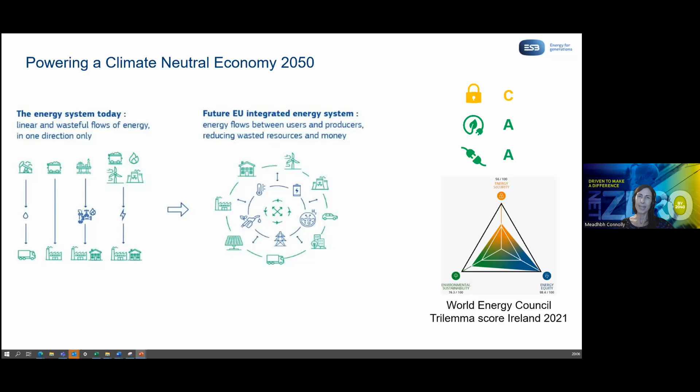So we started 100 years ago with a highly renewable electricity system powered by Ardnacrusha. And then we progressively carbonised our system as we became pyromaniacs and discovered the convenience of burning fossil fuels to produce electricity. The power output was dispatchable, which makes for a very reliable system where the generated electricity can be just adjusted up and down to meet demand. And it was also easy to stockpile fuels in oil tanks, in the coal yard, in peat bunkers, making the electricity system very secure for a few weeks in case of fuel supply interruptions.

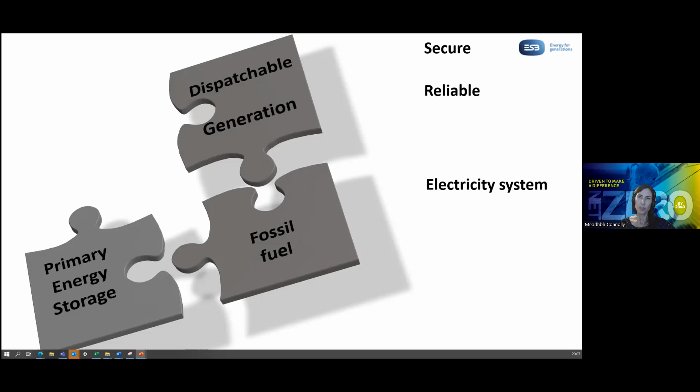We woke up, albeit late, to the carbon problem, and we focused on building renewables. However, fossil-based dispatchable generation still underpins the reliability of the system, and the primary energy storage, the oil tank, the coal yard, the peat bunker, the gas field, and the large valve to European gas supply secures this energy system.

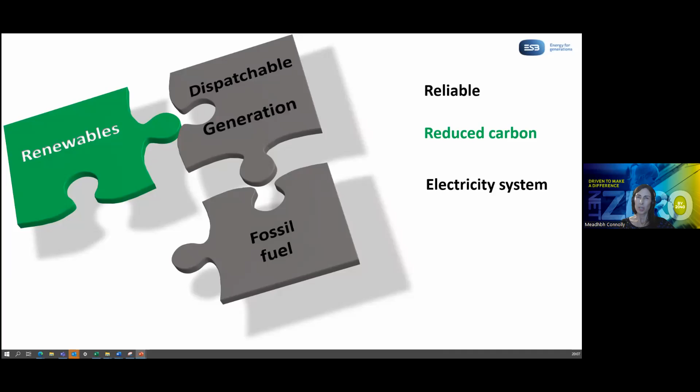As we close oil, peat and coal generating stations, which is the correct decision as we decarbonise, and their associated primary energy storage, we dilute the security of the electricity system. If we were to take out the fossils entirely and just have renewables, well, we'd have a renewable electricity system, which is intermittent and not secured.

If heat and transport are electrified, and we no longer have tanks of oil in our driveways, our bus depots, our back gardens, then a weather-dependent electricity system will have a greater significance in the overall Irish economy.

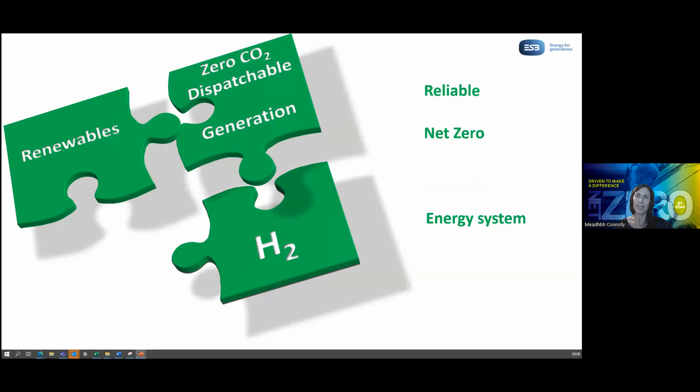And if we extend the reach of our renewable generation into the hard-to-abate sectors, such as the high-temperature heat and heavy transport, using hydrogen produced from renewable electricity, we can achieve a zero-carbon energy system. But we don't want a scenario where we have to check the weather forecast to see if the 46A electric bus will be running, or if the heavy goods vehicles can have enough renewable hydrogen to deliver food to supermarkets. To ensure a reliable system where energy is available on the calm, dark days, as well as the windy or sunny days, we need to add in zero carbon dispatchable generation that can be ramped up and down as needed to meet demand.

But these dispatchable generators need the zero carbon fuel. So to secure this zero carbon system and supply strategic and operational fuel reserves for this dispatchable generation, we need to store enormous quantities of energy. So the foundation for net zero is based on four large infrastructural elements: renewables, hydrogen, zero carbon dispatchable generation, and storage. Don't be deceived by this simple four-piece jigsaw, because it's not easy. The delivery of this infrastructure needs to be planned within a whole system integrated approach that aims to synchronize all the elements to build a secure, resilient, reliable system at the lowest cost to the customer.

Hydrogen is not last mile on the net zero journey. We urgently need to enable development of renewable projects for hydrogen production as well as for electricity, so that we can transition dispatchable generation from fossil fuels to renewable hydrogen. And we need to develop large-scale storage projects, which are no-regrets, delivering security of supply in the short term and enabling transition to zero carbon solutions in the longer term.

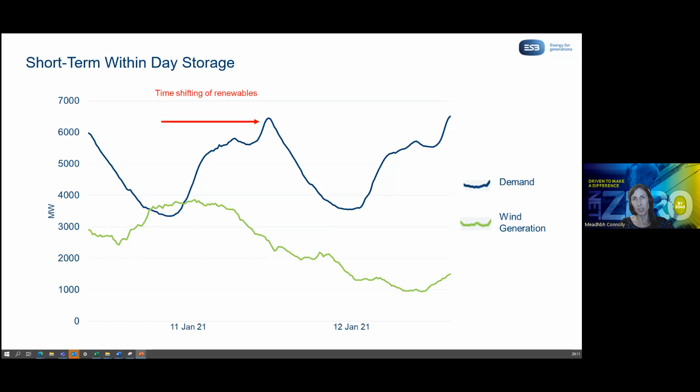I want us to focus on the longer term storage, the periods of no wind that will exist regardless of how much installed capacity. So what is the 10-day storage solution? What's the backup to renewables for the so-called Dunkelflaute events when there's no wind or solar? And what about Q3 in 2021, when there's a period of up to 6 weeks of no wind in Ireland, and no wind in GB, and no wind in Northwest Europe? So while interconnection is important, it has limited benefits in interconnected systems based on renewables that are all exposed to the same weather anomalies.

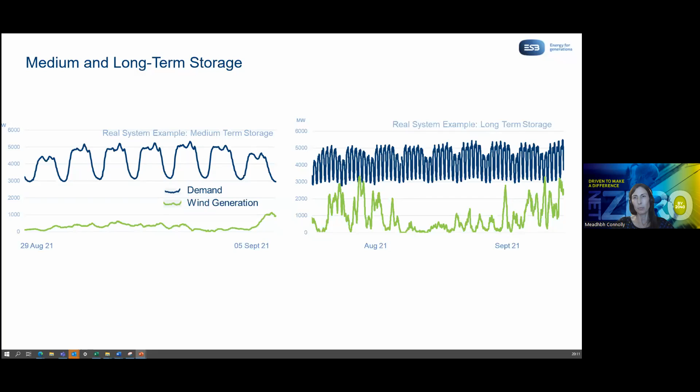And that's just the 2021 electricity system. What about when we electrify heat and transport, and we transfer the seasonal patterns from the fossil system to the electrical system? The seasonal variability of heat dwarfs that of the current electricity demand, with over 7 times the difference between the daily minimum and the daily maximum in energy for heat demand. It's a big challenge to flatten this curve. So electrification will further drive the need for seasonal storage, even with increased efficiencies due to better insulation and use of heat pumps.

In fossil-based systems, oil, gas, and coal can supply baseload energy and do all the heavy lifting in balancing the energy for electricity demand and heat demand. Dispatchable generation, be it oil, coal, and gas, is ramped up and down to meet electricity demand and heat demand. And there's pressure on the gas demand, as we saw in 2018 with the beast from the east. We diverted the electricity system away from gas and over to coal, oil, and peat to make sure gas was available for residential heat. But in a zero carbon system with high levels of wind, the system imbalance between electricity demand and available renewable generation could be multiples of what we see today, but without the ready access to fossil fuel storage to manage it.

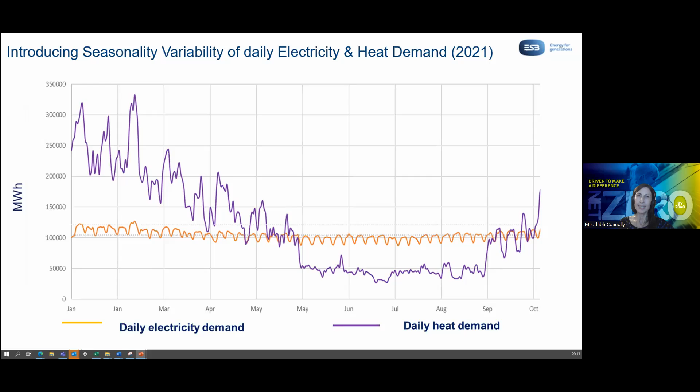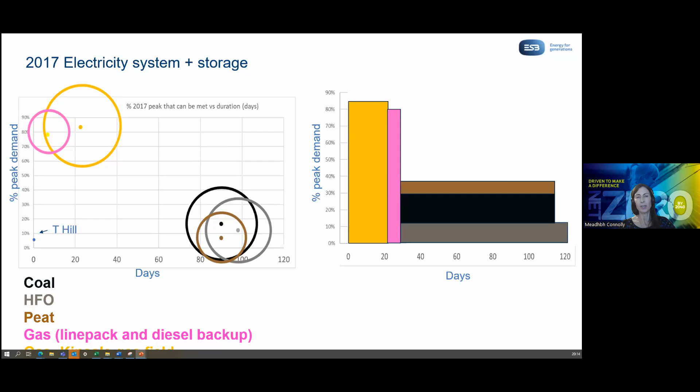If we move forward to 2025, the gas storage at Kinsale is closed, the peats are closed, Moneypoint is no longer burning coal, Tarbert is closed under IED. So the primary storage is whatever line pack there is in the gas and the distillate backup as mandated by the grid code for the gas turbines. And I'll remind you, Turlough Hill and the couple of battery projects will be that small little dot in the bottom left corner.

So we could keep about 66% of the energy system going just for a couple of days. And bear in mind the World Energy Council trilemma I brought to your attention earlier on - we had a score of C there before we lost these primary energy stores.

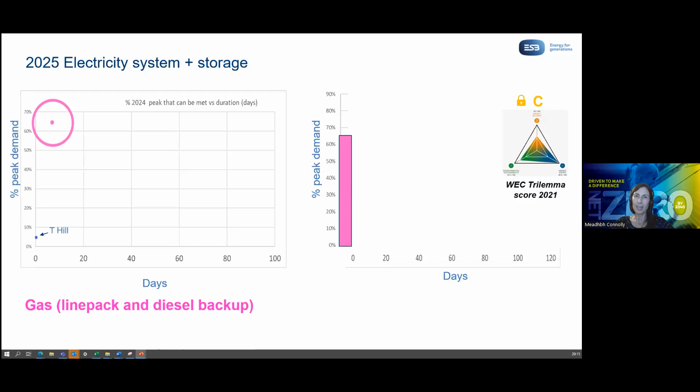So some would say we have evolved to a large European gas network, and I produced these slides before the situation in Ukraine arose. The large circles with the flags represent gas usage, and their relative size illustrates relative consumption of gas across various member states. The smaller circles within the flagged circles stand for the capacity of the gas storage infrastructure in terms of days of gas consumption. Germany, a large gas user, has infrastructure to store gas to meet its domestic requirements for 96 days. Great Britain is also a large consumer of gas, with infrastructure to store gas to meet its domestic requirements for about 5 days. Ireland is in the process of closing our only gas storage infrastructure down in Kinsale, which was 2.3 terawatt hours. We're connected at the tail end of a European gas network via a non-EU member state, which itself has very low gas storage capacity compared to its usage.

Paul Deane in UCC has repeatedly said, energy supply is not just a matter of physics anymore, it's a matter of politics. And while physics is predictable, politics is anything but. So can we assume that the UK will keep the gas valves open in case of an emergency?

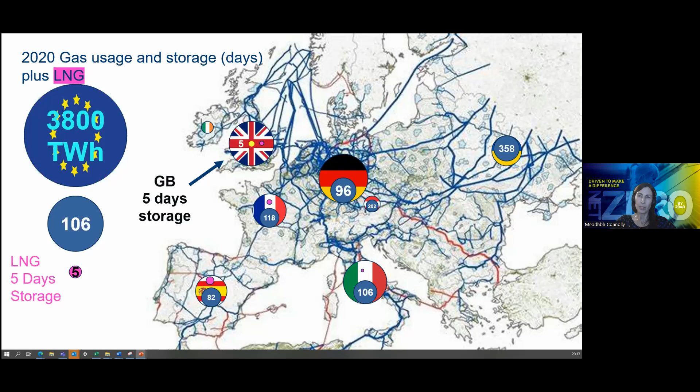Just to reinforce my earlier point about infrastructure capacity for various member states and gas storage, annual gas consumption in Germany and GB is similar. This graph represents the current gas storage in Germany, Italy, France, and UK. Germany's current gas storage is about 24 times that of GB.

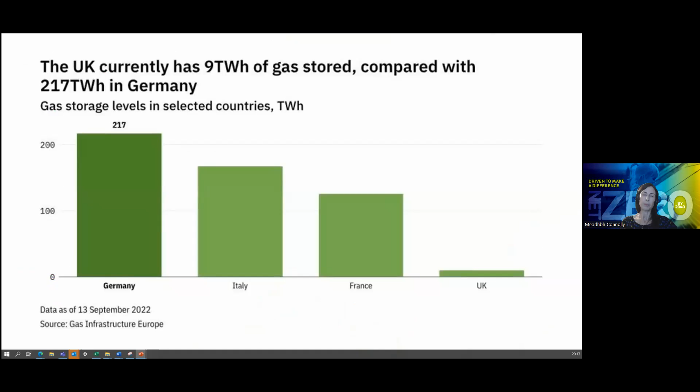As I said at the start, we've a long way to go on the decarbonisation journey, despite all the wind farms that have been developed. The SEAI data is very insightful. In 2019, around 90% of our energy use was fossil-based. Net zero needs a lot more renewables.

But it's also interesting to look at energy storage that's securing our energy system. On the right-hand side, I've brought out the primary energy usage based on the SEAI data. The circles on the right are scaled to proportion. The outer circle stands for usage, and the inner circle is an estimate of storage capacity under each fuel. In 2019, our primary energy usage was 170 terawatt hours, and the storage capacity was equivalent to about 59 days of this energy usage. But we can see the primary energy usage is heavily dependent on fossil fuel. The primary energy sources with the most resilient storage capacity are oil, peat, and coal, all on a downward decline as we decarbonise. Wind generation backup in Turlough Hill is a mere 1.4 hours equivalent, back in 2019.

So there are about 8.5 weeks of primary energy storage. 96% of this is in the form of oil, peat and coal. So this form of storage needs a zero carbon solution as we move to net zero.

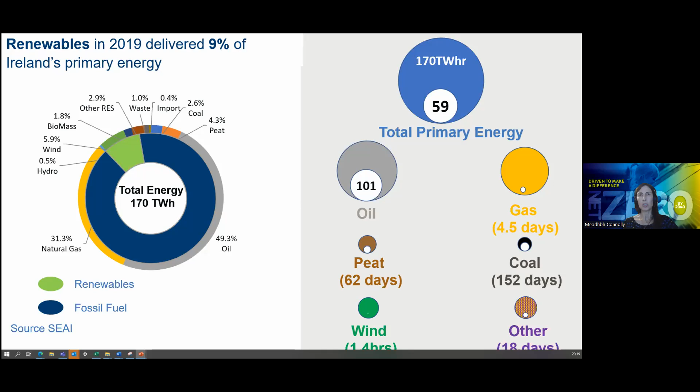The 2019 system, I've illustrated here using scaled circles. The sources of primary energy storage - oil dwarfs all of the others. We've done estimates for primary energy requirements in a net zero system, and happily we come up with a figure consistent with the UCC figure, about 128 terawatt hours. I'll talk about that later. So in 2050, if we replicate the current levels of primary energy storage of 59 days, that'll require more than 20 terawatt hours of zero carbon energy storage.

This graph shows the various technologies to support a zero carbon energy system. We need all of them, from the short-term timescale to ensure system voltage and frequency are kept stable, right out through the storage to deal with system resilience. Oil storage has traditionally provided this in preparation for global supply shocks.

There's an important feature of this graph on the left-hand side, which shows all of the technologies on one graph. The storage capacity is on the x-axis and the discharge time on the y-axis. It hides scale - the scale of seasonal storage required is enormous. It'd be the equivalent of 1 billion Tesla Powerwall domestic batteries. It's equivalent to about 10,000 Turlough Hill pumped storage units. It's equivalent to 500,000 of the Aghada BESS projects that was recently commissioned by ESB.

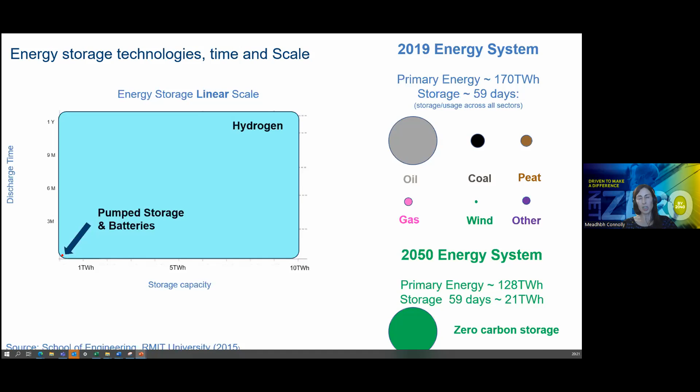So the only solution really we have in Ireland in this space is hydrogen. We don't have the nuclear option. We don't have geology suitable for geothermal. So the only solution is renewable hydrogen.

Looking forward to 2050 and what that would look like, the EU strategy is to electrify as much as possible. Our estimates are 62 terawatt hours of renewable electricity for end use as electrons. To put that in context, the current electricity system is about 40 terawatt hours.

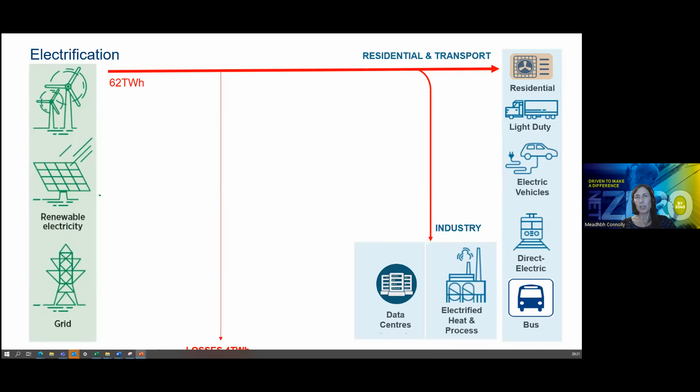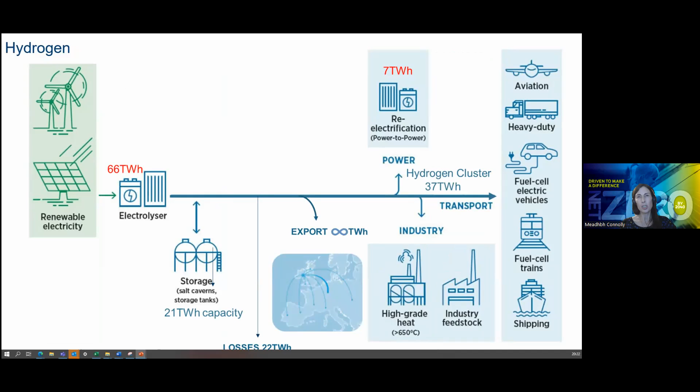After electrification, there's a need for a renewable molecule. So we see the need for an additional 66 terawatt hours of renewables to produce hydrogen, decarbonise areas that cannot be electrified, including backup generation.

So bringing these together, we see the 4 pillars: renewables, about 30 gigawatts of offshore wind equivalent, hydrogen production, energy storage, and zero carbon dispatchable generation, working together in an integrated manner for a secure, reliable source of renewable energy in the form of electrons or molecules.

As I said, the scale of this is huge, 30 gigawatts offshore equivalent. That's even before we tackle new industries like e-fuel for aviation and shipping, which WEI reckon would require an additional 10 gigawatts of offshore wind.

It's before we tackle new industries like renewable fertilizers for indigenous use or for export. Or it's before we tackle the export opportunities to countries like Germany or the Netherlands, who already recognise they have a shortfall between their demand for renewable hydrogen and their actual ability to generate it.

The key thing in this is energy storage. It's essential and is the key enabler of the net zero system. It acts like the buffer that helps the delivery of all of the other elements and still providing energy security for the transition. We store hydrogen produced by large-scale renewables for use in the hard-to-abate sectors and for zero carbon electricity when the wind isn't blowing, effectively allowing the renewables to back up the renewables.

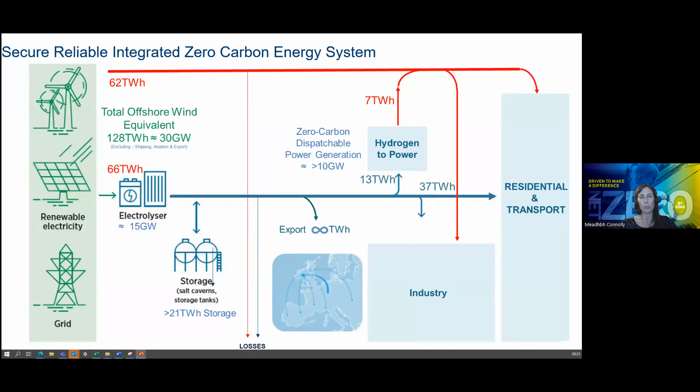Our targets in Ireland need to reflect net zero. We need to develop a single overall master plan for the transition to net zero by 2050 of the Irish energy sector, electricity, residential, industry and transport to see what can be met by electrification, what needs to be met by renewable hydrogen, and what quantity of renewables we need to meet that.

Our estimates are 30 gigawatts, as I said, for offshore wind, 15 gigawatts for hydrogen production, at least 10 gigawatts of zero carbon dispatchable generation, and tens of terawatt hours of energy storage.

It has been agreed in many studies that a zero carbon electricity system needs to happen before the net zero energy system. So we put out the figures for a net zero electricity system in 2040, and we need to work these back to 2030. And we have recommendations for 2030.

And there's a clear gap between the current Irish targets for offshore wind, hydrogen production, zero carbon power generation and storage, and what's actually required.

Economic supply chains and the lead times for infrastructure mean that urgent decisions and actions are needed to ensure we meet our net zero targets and ambitious interim milestone targets on the road to net zero. Targets are needed for each of these four elements.

For a system similar to Ireland is Denmark. It has a 2 gigawatt ambition for hydrogen production in 2030.

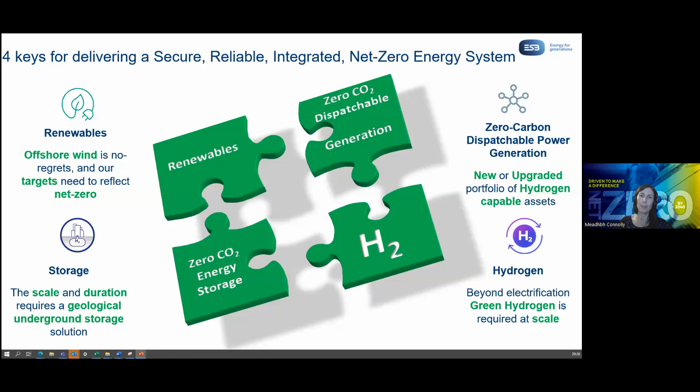We at ESB were one of the 135 or so responses to the DECC consultation on hydrogen strategy. And our submission was based on insights gleaned and refined over the last 3 to 4 years. We need to take an integrated energy system approach.

Beyond electrification, green hydrogen is required for the hard to abate areas: heavy transport, shipping and aviation, industrial heat and zero carbon generation. To fully decarbonise, we need more than 30 gigawatts of offshore renewables, so we need to harness floating offshore wind. And with the known challenges of building infrastructure in Ireland and the normal project attrition, we'll miss the 2030 5 gigawatt offshore targets with significant consequential future liabilities due to carbon budgets unless we take action.

Ireland's hydrogen economy is inextricably linked to Ireland's wind economy. So we need to leverage our existing transmission infrastructure by using hybrid connections to accelerate the development of Ireland's hydrogen industry.

To ensure a secure, reliable, resilient, zero carbon energy system, we need enormous quantities of seasonal storage. This will more likely be an offshore geological solution, which will require commercial incentives.

Green hydrogen powered by offshore wind is the most likely vector for large-scale energy storage. Zero carbon dispatchable generation powered by green hydrogen is needed to back up the power system when the wind isn't blowing and the sun isn't shining.

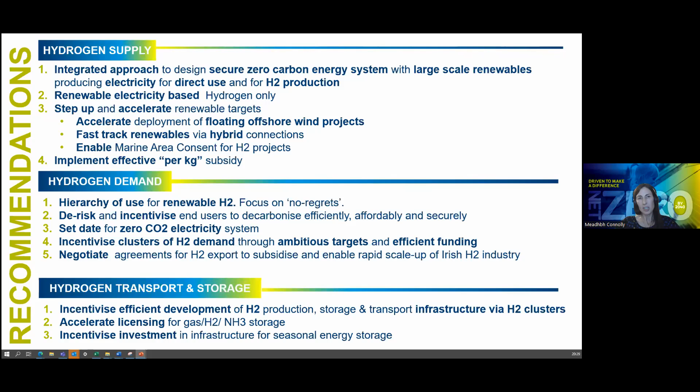In terms of transport and storage, we need to incentivise development of hydrogen production, storage and transport infrastructure via clusters. We need to accelerate the licensing for gas, hydrogen and ammonia storage, and we need to incentivise investment in this infrastructure for seasonal energy storage.

So what are ESB doing? We believe in learning by doing, and we're developing what we call lighthouse projects to showcase the role of renewable hydrogen in transport, industry and dispatchable generation. And while these projects won't be profitable, ESB is prepared to invest and is open to work with industries seeking to decarbonise.

Hydrogen needs scale, and the success of the hydrogen economy in Ireland is predicated on scaling up of offshore wind. So our approach in scaling up would be to use a clustered approach to solving the problem. At a minimum, ESB believes there should be Dublin, Cork Harbour and Shannon Estuary clusters, but others may be viable or required. So that's an invitation to stakeholders in the Northwest to come and talk to us.

ESB Carrington Power Station in GB is now an active member of the HyNet project, which is an innovative, low carbon and hydrogen energy project based around a cluster of industries in the northwest of England. HyNet, through Cadent Gas Networks, have brought the Carrington hydrogen supply forward into 2027, which means that Carrington could be one of the first, if not the first, CCGT to burn hydrogen in the UK.

So ESB intends to harness all of that learning to bring back to Ireland. You're also probably aware that ESB and dCarbonX have signed a joint venture agreement to progress large-scale energy storage projects off the coast of Ireland.

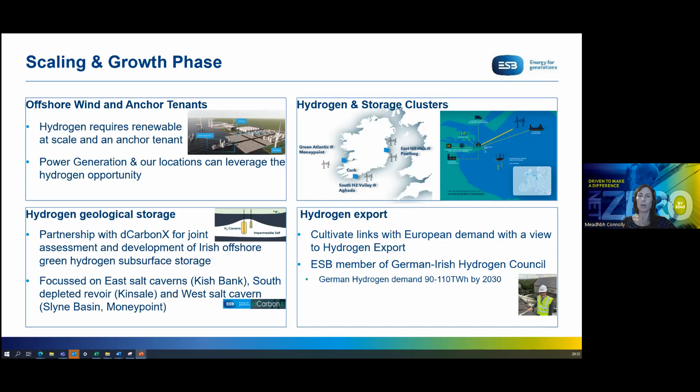So ESB intends to be a major hydrogen producer in Ireland and for Europe, cognizant of the need to solve our own decarbonisation problems and energy security problems in Ireland first. Energy export has a place, but only in an Irish context.

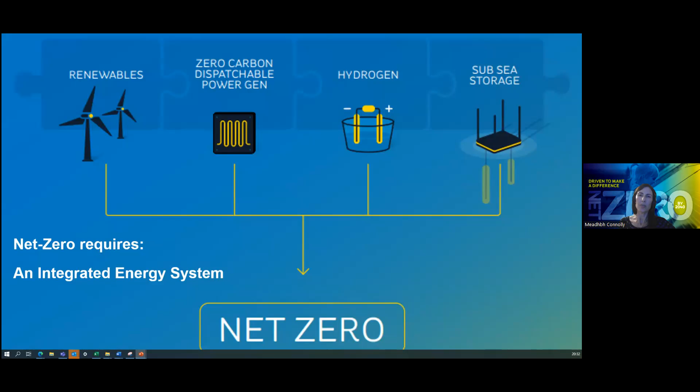So net zero for ESB in 2040 and net zero for Ireland in 2050 needs an integrated energy system with renewable hydrogen production, dispatchable generation and storage. I'd welcome any questions you have now.